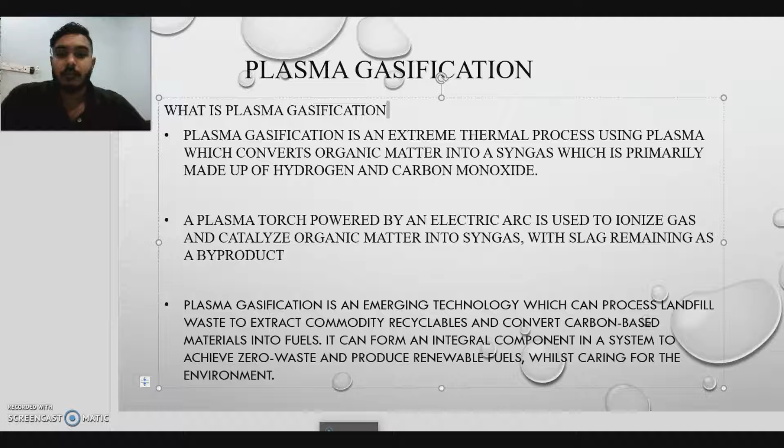Whilst caring for the environment, plasma gasification causes no damage to the environment. It is also very easy to distribute the waste products using this process. It can be a renewable energy source too, so we can reuse waste products through plasma gasification processes.

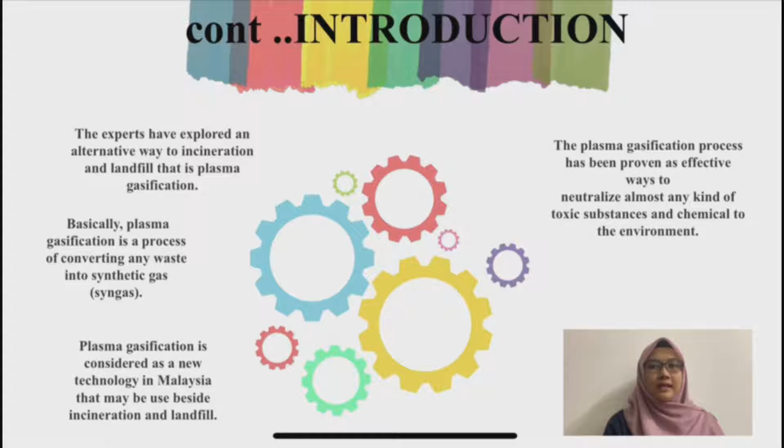Regarding plasma gasification, experts have explored an alternative to incineration and landfill, which is plasma gasification. Basically, plasma gasification is a process for converting any waste into syngas. Plasma gasification is considered a new technology in Malaysia that may be used alongside incineration and landfill. The plasma gasification process has been proven effective at neutralizing toxic substances and chemicals harmful to the environment.

There are nine named methods of solid waste disposal. First, solid waste open burning. Second, sea dumping process. Solid waste sanitary landfill, incineration method, salvaging procedure, composting process, disposal by plowing into the field, disposal by hog feeding, and lastly, biological digestion.

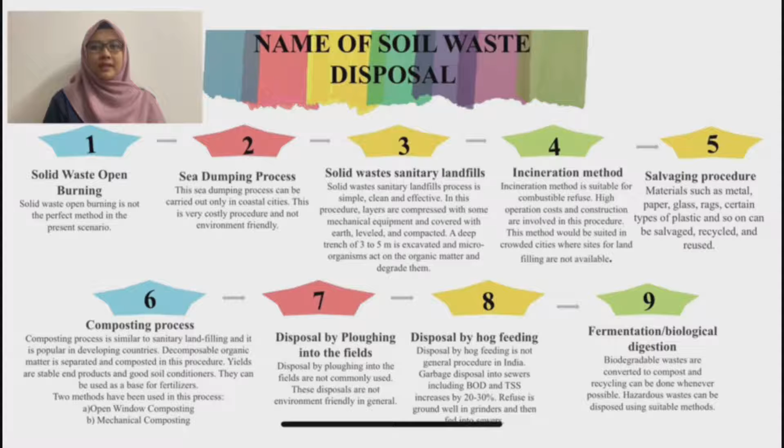What is the management method of plasma gasification? Plasma arc technology has also drawn questions from environmentalists because of contaminants that could be left in the product. They contend that if the gas produced is burned for energy without proper treatment, it could contain toxic acids, dioxins, and other pollutants, and could retain high levels of mercury and other hazardous materials that create challenges for solid waste disposal.

Environmentalists also worry that people may become complacent about municipal recycling and reduce the waste stream if they believe the waste can simply be recycled through this process.

In a plasma gasification process, an electrical source generates very high voltage electrical current through two electrodes connected with a gap between them. Inert gas, under very high pressure, passes through the electrical arc into the sealed container, which we call a plasma converter, for the waste material.

Temperatures in the column reach more than 14,000 degrees Celsius, hotter than the surface of the sun. Exposed to such temperatures, most waste transforms into gas consisting of base elements, with complex molecules torn apart into individual atoms.

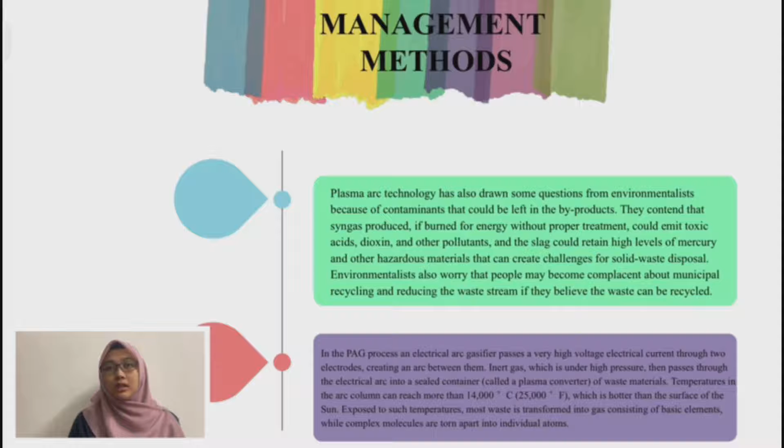Hi, Assalamualaikum. My name is Najib.

Now I will show you how plasma gasification works. This is how plasma gasification works.

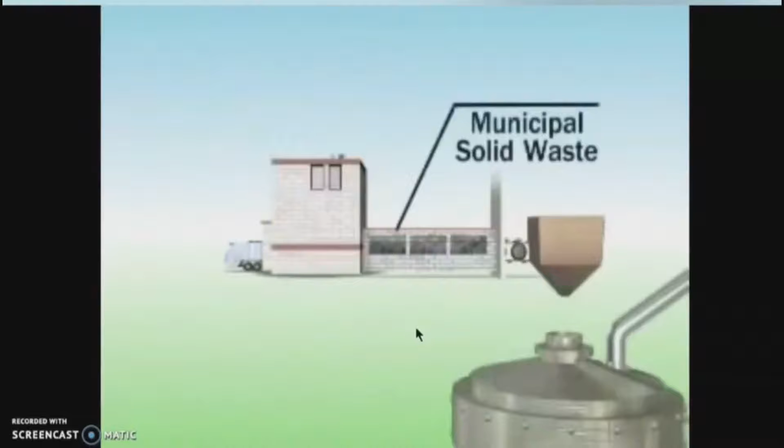Municipal solid waste is fed into the plasma gasifier. The plasma gasifier has 4 to 6 electric plasma torches that heat air to the plasma state.

The hot air is then injected into the gasifier, heating a bed of metallurgical coke and limestone to 7,000 to 8,000 degrees Fahrenheit. The hot gases in the bed material break down the fuel to produce a synthesis gas, or syngas, consisting primarily of hydrogen and carbon monoxide gases.

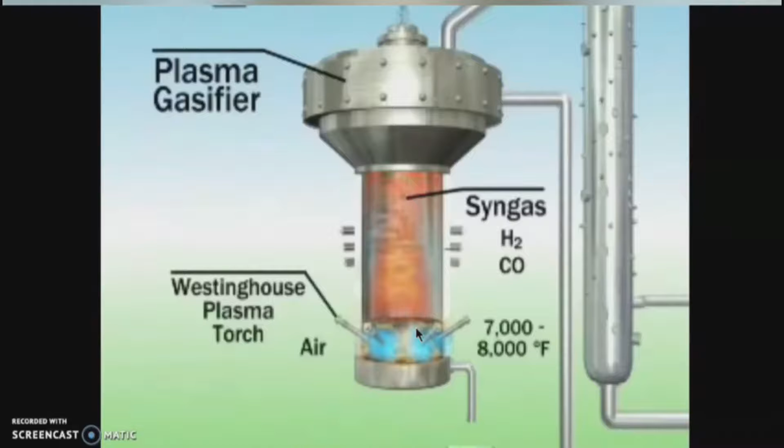The syngas is isolated, cleansed of pollutants and particulate matter, and then used to generate electric power.

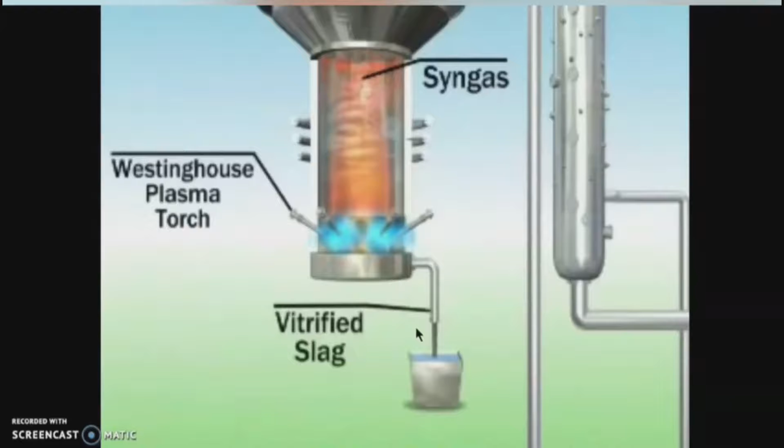The remaining inorganic components of the fuel which do not vaporize are converted to molten slag, collected through the bottom of the gasifier, and cooled into a glass-like byproduct. The vitrified slag can be safely used as road bed material for building highways or in other construction projects.

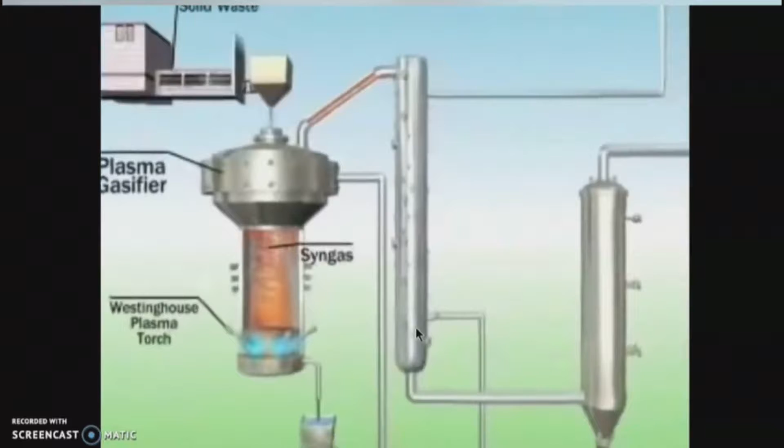The newly created syngas exits through the top of the plasma gasifier and then enters a heat recovery unit, where the excess heat is recaptured to create steam, which can be used later in the syngas cleaning process.

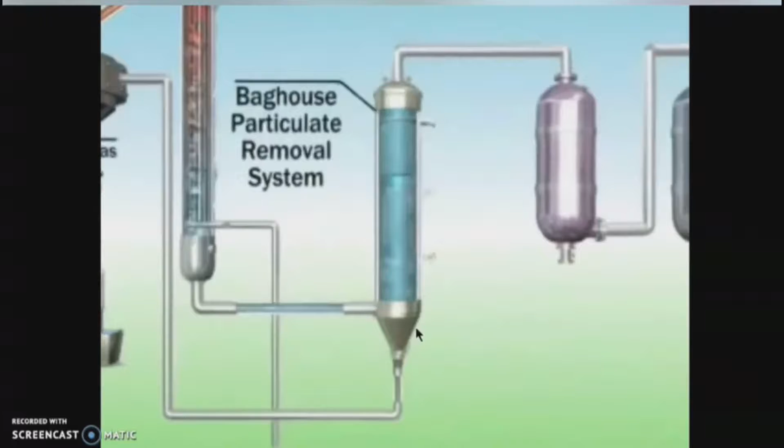The cool syngas then moves to the baghouse, a particulate removal system which separates particulate matter from the syngas. The syngas continues through the cleaning process, which includes a series of scrubbing and chemical stripping processes that further cool the syngas and remove pollutants.

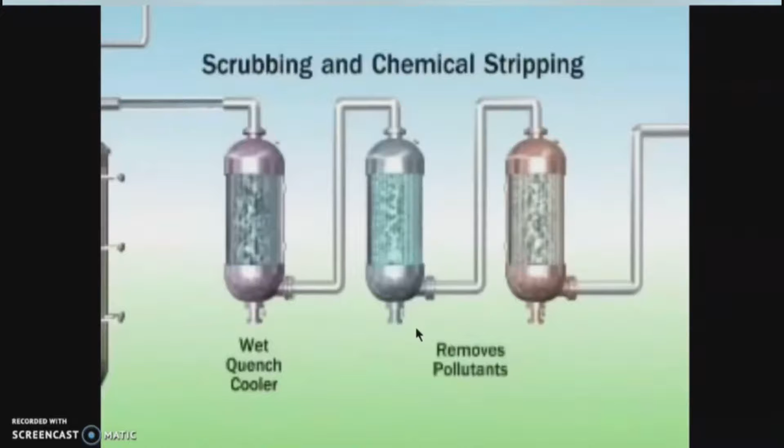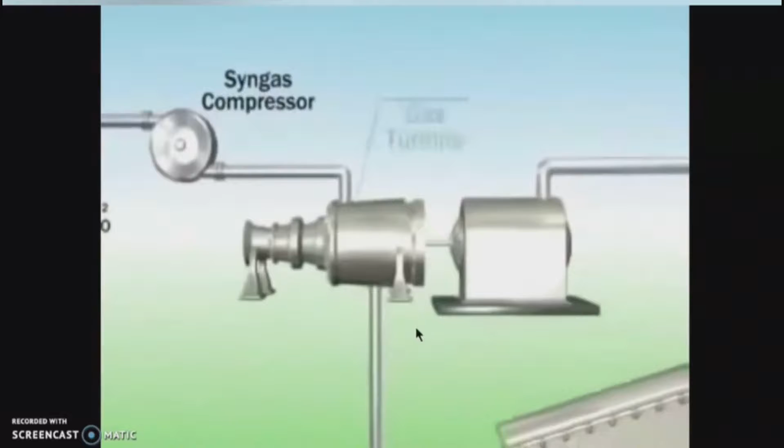Once the syngas is cleaned, the remaining gas, composed largely of hydrogen and carbon monoxide, is compressed and then combusted in the gas turbine. The gas turbine spins the generator to produce electricity.

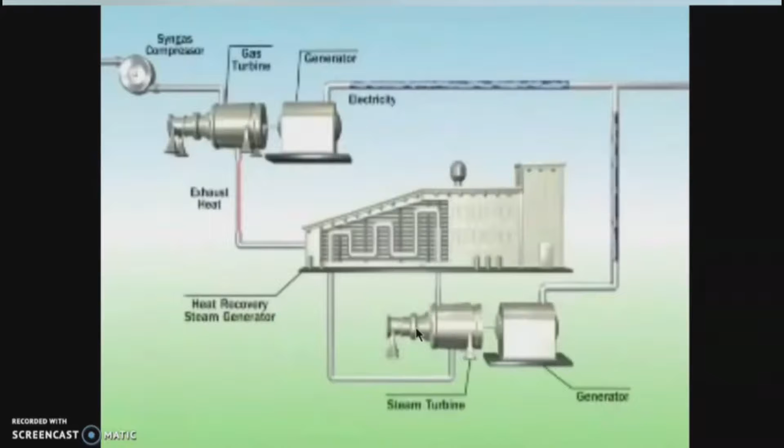Exhaust heat from the gas turbine is then used to create steam in the heat recovery steam generator. This steam is used to drive a steam turbine, which spins another generator to create additional clean energy through an efficient combined cycle process.

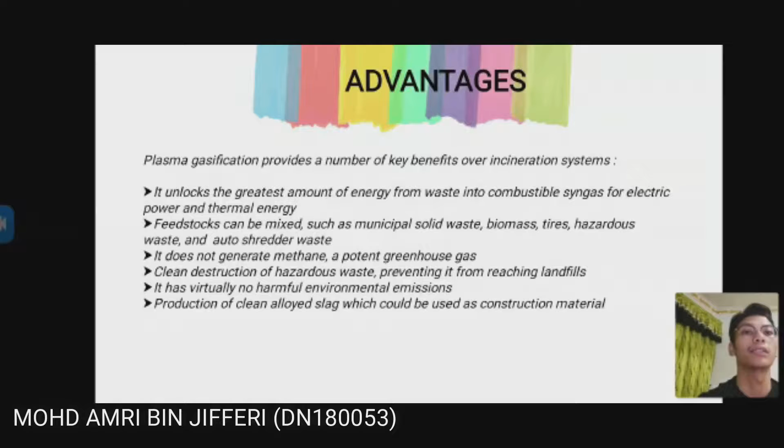Plasma gasification provides a number of key benefits over incineration systems, which could lead it to unlock the greatest amount of energy from waste into combustible syngas for electric power and thermal energy.

Secondly, feedstock can be mixed, such as municipal solid waste, biomass, tires, hazardous waste, and auto shredder waste. And also, it does not generate methane, a potent greenhouse gas.

For knowledge, greenhouse gas is something that absorbs heat energy emitted from the earth's surface and radiates it back to the ground. In this way, they contribute to the greenhouse effect, which keeps the planet from losing all its heat from the surface at night.

And then, clean destruction of hazardous waste, preventing it from reaching landfill.

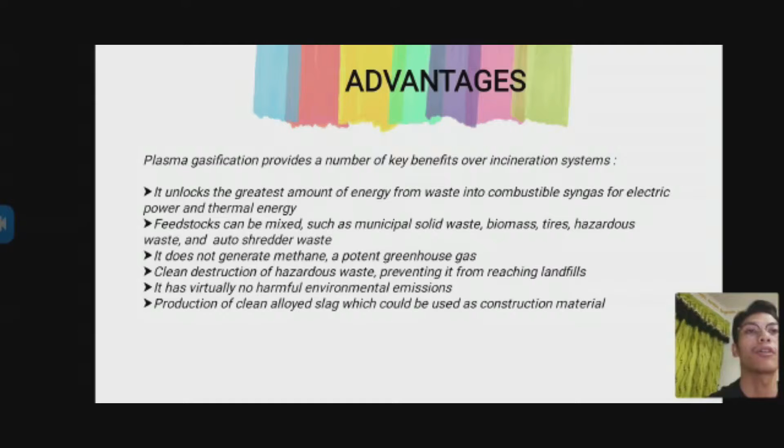Next, it has virtually no harmful environmental emission. And the last one is production of clean alloy slag, which could be used as construction material, for example, slag can be used for cement, rock wool, and other applications.

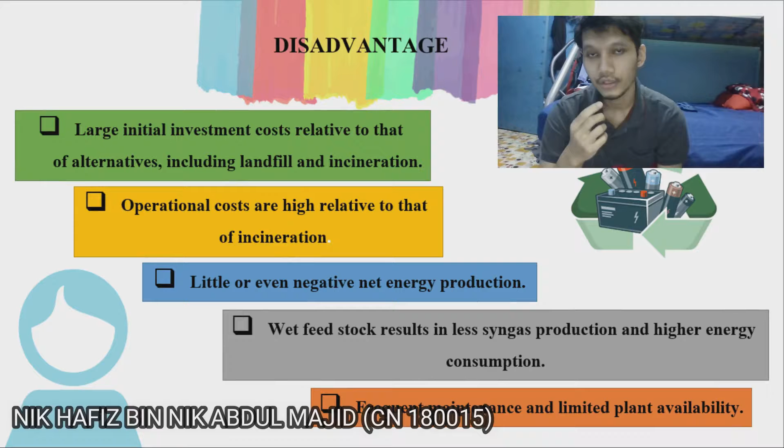The first disadvantage is large initial investment cost relative to alternatives, including landfill and incineration. This is because plasma gasification is a waste treatment technology that uses high electrical energy and high temperature created by an electrical arc gasifier, which is why it has a large initial investment cost.

Secondly, operational costs are high relative to incineration. Compared with commonly used combustion methods for waste treatment, it uses high energy and carbon conversion.

Third, little or even negative net energy production. Fourth, wet feedstock results in less syngas production and higher energy consumption.

Finally, frequent maintenance and limited plant availability.

Overall, compared to other methods, traditional solid waste management methods such as composting, landfill, and incineration are not very helpful to completely eradicate the problem of solid waste management.

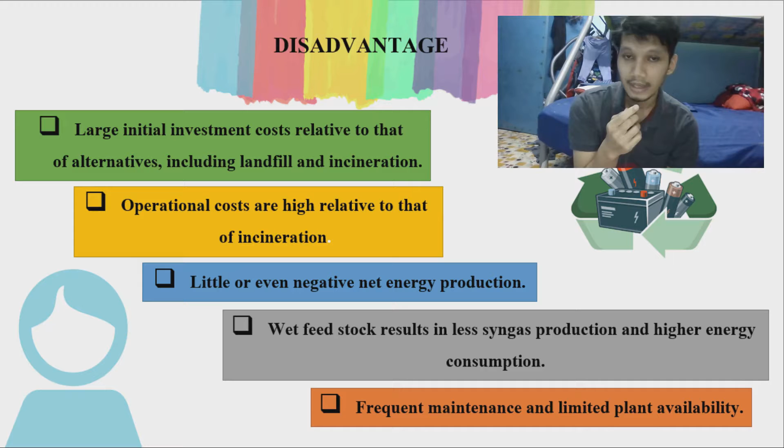In this gloomy situation, plasma arc gasification has emerged as a breakthrough technology which not only breaks down waste into elemental form but also produces electrical and essential byproducts. However, it requires high cost, not only for operational but also initial investment costs.

Last part is conclusion. There are many obstacles facing the path toward sustainable waste management in Malaysia. In Malaysia, our technologies for managing scheduled waste also face environmental risks. The history and basic principles of plasma gasification technology are discussed.

Emerging product applications, problems, and possibilities are presented in order to be mentioned as one of the available treatment technologies of waste treatment. Scheduled waste must be handled and processed with the latest possible technology in order to accomplish a safe goal. Thank you.